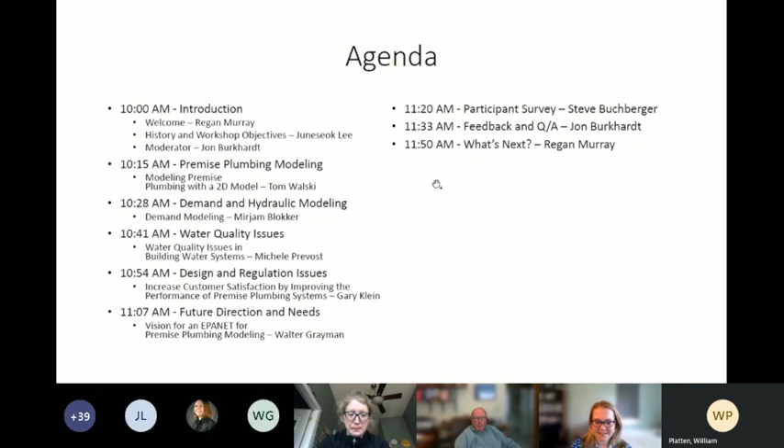Thank you, Regan. So let me first go over EWRI, the Environmental and Water Resources Institute. I believe most of you are already very comfortable with EWRI. Very briefly, it's ASCE's technical arm for environmental and water-related issues, and currently there are about 25,000 members within EWRI.

PPM, Premise Plumbing Modeling, was established last year in November, and it's a task committee of the WDSA, or Water Distribution System Analysis Committee, with a lead role in EWRI in advancing the area of premise plumbing modeling. So the purpose of today's webinar, which was originally supposed to happen as a face-to-face workshop, is to advance the science of this new field of PPM and help develop a building water systems management tool for use by practicing engineers, as well as the larger WDSA or water distribution systems research community, to support the safe design and operation of water distribution systems.

Having said that, I will turn it over to Jon, our moderator today.

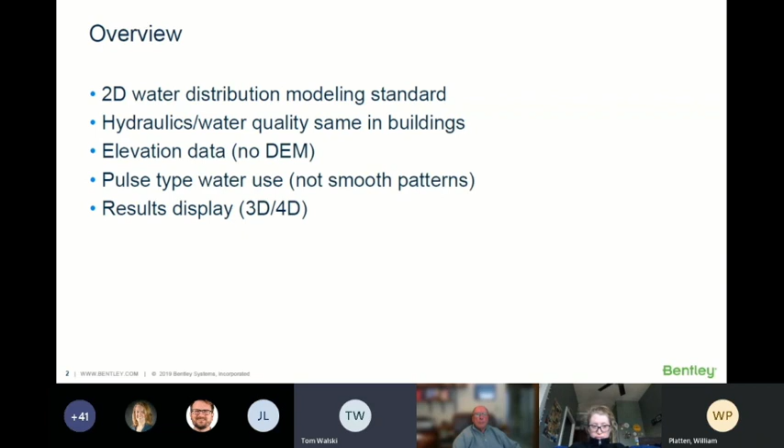Here's my trivial model of a system over on the... let's see, do you see my pointer when I'm moving it, or is my pointer not visible? No, I guess it's somebody else's hand I see moving around.

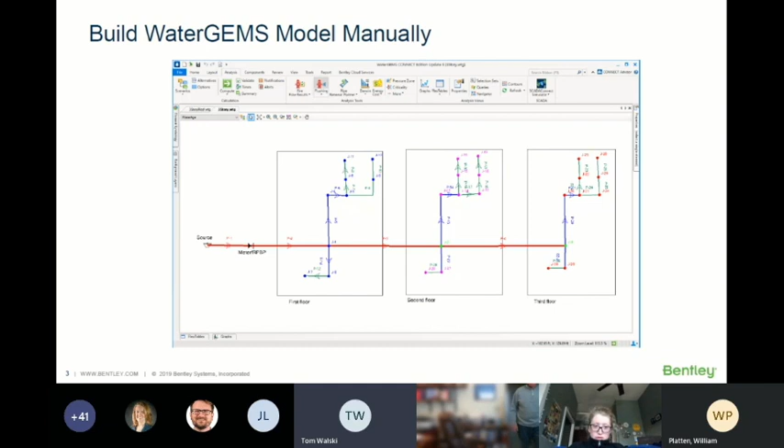This is what we have to do when trying to model a building with standard 2D models: break the floors up into individual models. Here is the building I built, a 3-story building. We're going to treat the main in the street as a constant head source. This isn't always true, but usually most buildings don't have a significant impact on the distribution pressure, so treating this as constant isn't too bad, or giving it some kind of pattern. Then we just laid out each floor with its own little plumbing, and we'll go over what those floors look like.

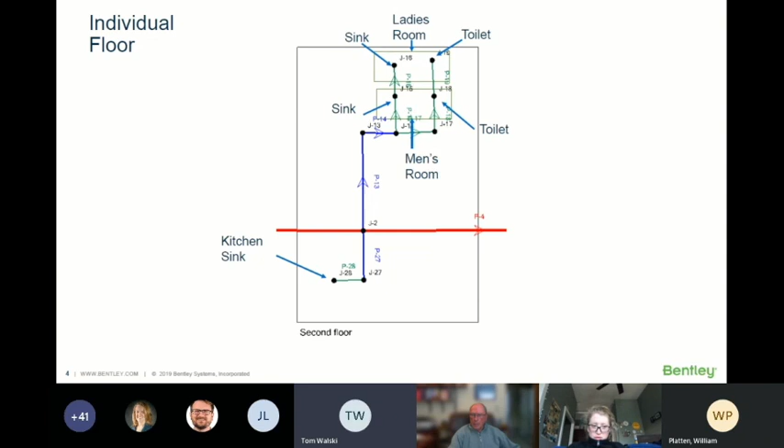Here's what the floors look like. Each floor has its bathroom with a sink, the ladies' room and the toilet, and the men's room. On the other side of the building is a kitchen sink. So this is our trivial building. Each of the floors is symmetrical just to make my life easier.

You can run the model with those patterns. I used a random number generator to make my demand patterns, with nobody in the building at night, and all these different water uses during the day. You can color code by these elements to see which faucets are running, which toilets are being flushed. Now I'm coloring by velocity of water in the pipes, and this looks really impressive. You just let this run as a time simulation, and you can see all these building water uses flashing on and off during the day. It's a good way to illustrate what's going on and track water quality, and it actually looks pretty good. You can see, okay, there's a guy who just flushed a toilet and didn't wash his hands, that sort of thing.

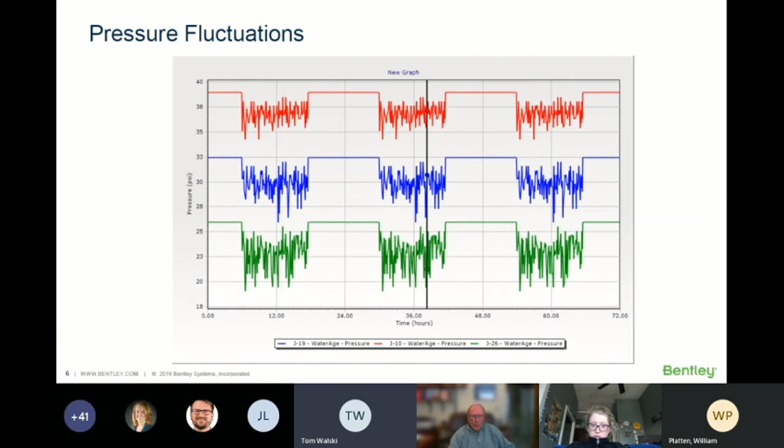Here's what the results look like for my little model. At night the pressure is flat because nobody's in the building doing much, and during the day you see fluctuations in pressure. We can do this for any property. The red is the bottom floor, so you get good high pressures. The second floor has lower pressures, and on the third floor we have the green, which is the lowest pressure, the higher up the building you go. So we can do all these kinds of things with existing tools, which is what I'm trying to show: that we can do building modeling with the tools that are already out there.

Now that's the age versus the age of the water in the street that you're starting with. You can also have a distribution system model that can model the inflow, but in this case I'm just using that as a constant at 0 age. The age isn't too bad. That first glass of water somebody takes out of the faucet is going to have some older water, but even so, unless it's a huge building, it's not too bad.

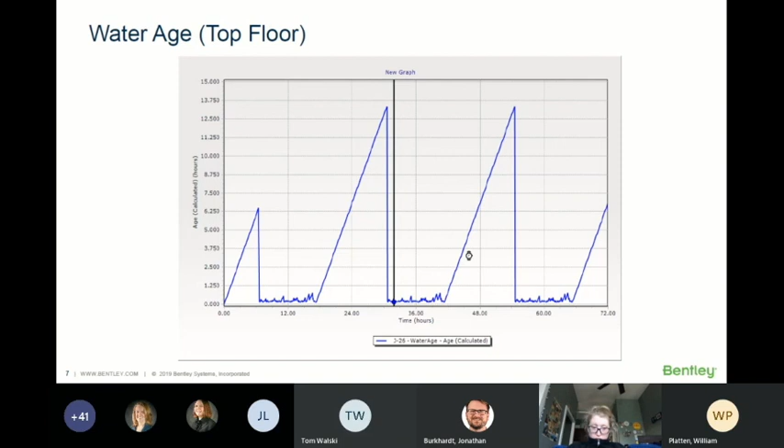Okay, and then we can actually look at the color code by velocity and see which pipes at any time have velocities there. So we do velocities and demands, and this is useful for seeing where the water goes. So this is the age in this particular case. You can see, at a certain hour, some of these lines haven't been operated yet, so they're getting old water, while the ones that have been operated don't take very long to get flushed out with clean water.

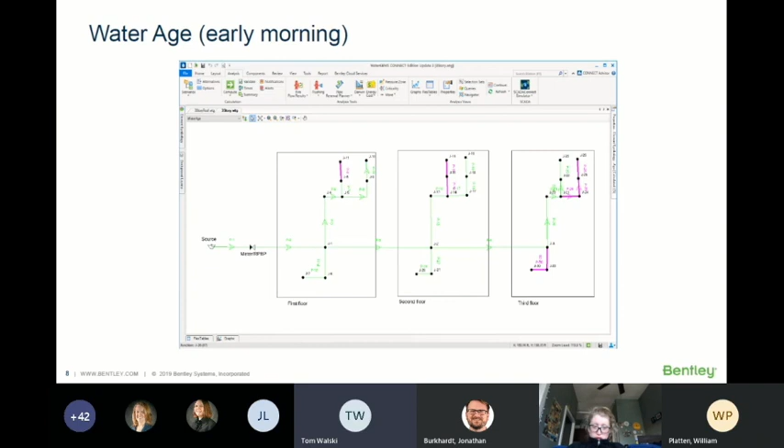Okay, then the next part of this is rooftop tanks. The place where things really change now are in buildings that have rooftop tanks. We're doing some work over in China where a lot of the tall buildings have rooftop tanks, and they really change the dynamics and the water age pattern pretty significantly. They keep the pressure a lot more stable, but they affect the water quality because the water age in these tanks can be pretty high.

And this is some work we're doing over there that is showing this is going to be a bigger problem than in buildings that don't have tanks. So with tanks, just like in water distribution systems, if you're having problems with old water, you look at the tanks, because that's usually where most of the aging occurs.

When you do have tanks, though, it doesn't really drop down that much. It takes a while for the water age. Depending on the sizing of the tank—a lot of tanks are sized for like a peak day flow or something like that—it takes a long time to turn over the water in the tank when you have that.

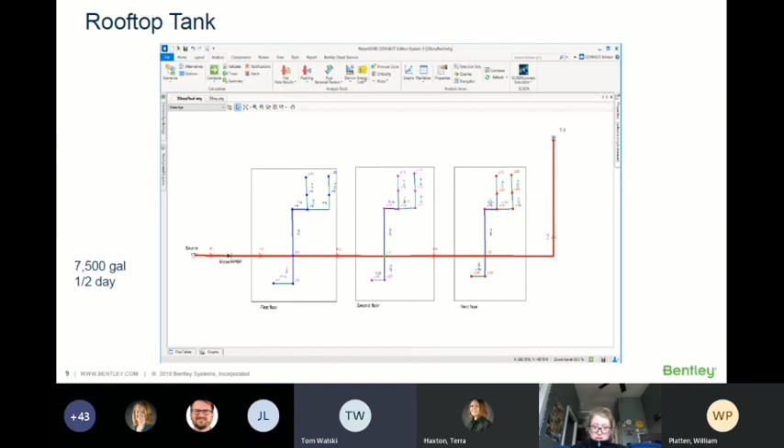So this is the kind of stuff you can experiment with. What if we don't fill the tank up all the way? Let's say we only fill the tank up part of the way during the day, or let the tank drain a lot more. A lot of these places, as soon as the water drops a couple of millimeters, they turn the pump back on, and that's not a good thing to do. But we can experiment with this, and this is the kind of result you see in terms of pressure.

Okay, then I looked at how to lay things out vertically, just to show that it can be done, two different ways where you put the riser pipe, but it doesn't look as pretty. I wasn't as impressed. I like laying the different floors next to one another, but if you want to lay them on top of one another to help display what's going on, this is what they look like. You can see this is laid out by diameter in this particular instance.

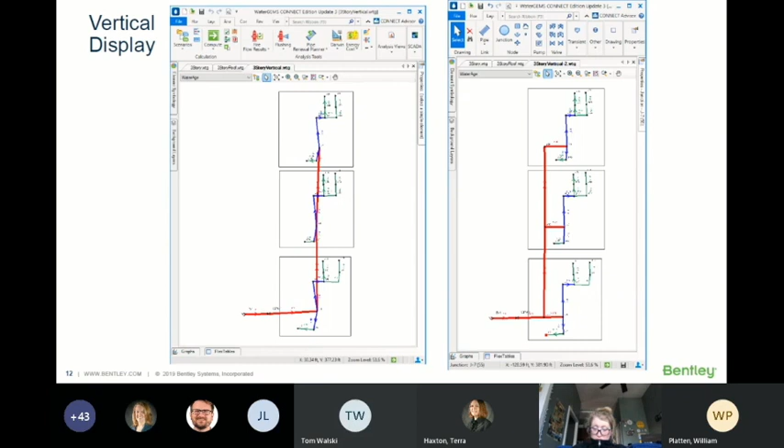So the big need here is how do you build these models? Before you could do it with a GIS, but we don't have GISs in buildings. So what you need to do is go to BIM type software. This is one of the places where we have amazing software where we can take the building, do an X-ray of the building, and have the material that tells us where all the pipes are. This is something you create as you're building the building.

You have a BIM model, building information modeling, and we could use it. That particular picture is actually an HVAC system, not the water system, but you get the idea that the data is there. So just as we import data from GIS to build water distribution system models, you can import data from building products pretty easily.

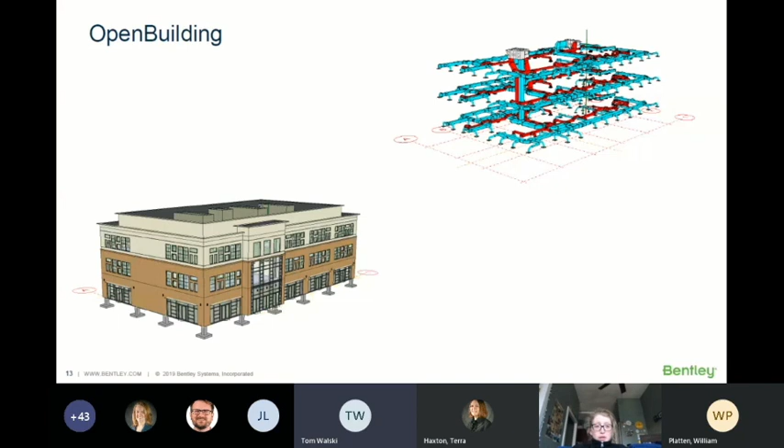Looking towards the future, this kind of stuff we already have. We can actually do hydraulics in 3 dimensions and show flows and all, but unfortunately it's only based on some really simple steady state hydraulics. So what we would need to do is link this kind of 3D technology for model building and results visualization with WaterGEMS or an EPANET-based solver or something, in order to come up with really great visualizations.

I think the 2D stuff that I was showing is okay, it works. But if you can show things this way, it really looks good.

So it's something we're kind of uniquely positioned for, because we have all these tools that work in 3 dimensions. We've done a lot of this, I guess we actually call it 4D, a 3-dimensional viewing based on context capture over time. We've done things with our flooding products where we could watch floods, actually move anywhere we want in the city and stand there and watch the flood come in and out.

So it's definitely doable, and it's a matter of when the demand from people who want to buy software and have money is there, we'll have this stuff implemented pretty quickly. The devil's in the details, of course, but the concepts are pretty easy. And again, for those of you who are researchers and don't have money, we'll work with you. If you want to do something built on 3D visualization, you can talk to me and we could discuss that.

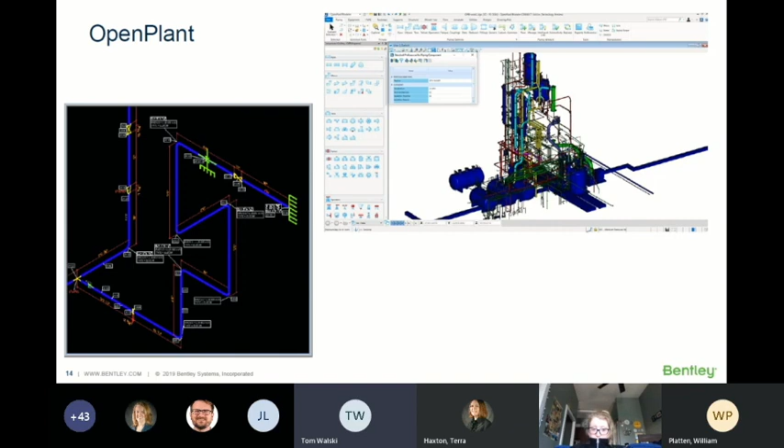Okay, next. I don't really do the 3D stuff myself, so I'm not that good at it, but we have people who do. To summarize, you can do water distribution, hydraulic and water quality models in buildings with what's right on the shelf now in EPANET. The big issues we have to overcome are easily bringing in elevation data and quickly doing that.

Modeling pulse demands, as I mentioned, I just used a random number generator to do the demands, and we can do better with that. I'm looking forward to the talks about hydraulic Poisson rectangular pulse models and such to generate small time scales, and tools to display things. We can do 2D displays, but we've got technology out there that goes even further than that. So that's some of the needs and what we have right now.

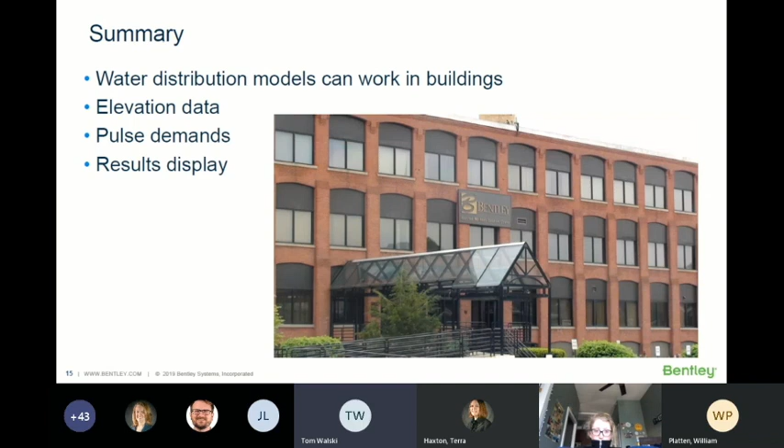Okay, thank you. The issues Tom brought up related to demand estimation, and that segues into the next section on demand and hydraulic modeling, where demand estimation and hydraulic modeling issues are important for premise plumbing systems. Water quantity delivery issues in a home or building can arise from poor distribution system pressure, as Tom noted, and then even from poor premise plumbing design or changes that may have happened over time that didn't take into account the whole history of the building.

Water quantity has been a major concern in building design, with a focus on ensuring each demand receives the minimum flow when requested. While many issues of water are more volume-based, as some people on this call may have noted, where you just wait for a glass of water to fill and it may take a little longer, or you may take a more time-based use where a shower with lower pressure may not really be desired, but within reason it's tolerated.

So you just take a shower for some length of time, and modeling the actual demands related to that is a challenging topic. Accurate modeling of usage patterns is critical, and models must ensure flow rates are accurately modeled if pressure conditions are not sufficient for the requested demand. Models may also need to predict and keep track of who or what is using the water. Mirjam Blokker from KWR Water will now present some areas on this topic.

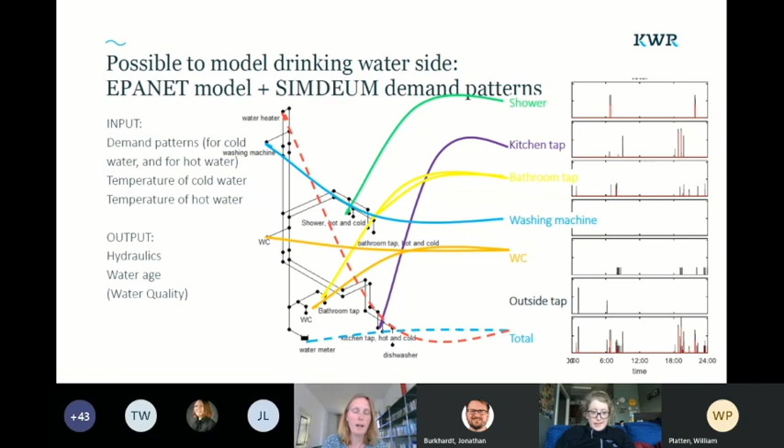So we've taken all the different end-use patterns and applied them to the specific tap. Then you can look at hydraulics, as Tom showed, and water age, and other water quality. So we've looked at temperature specifically, but also at some microbial parameters.

I would like to also apply these to premise plumbing of the in-home sewer, and I think the DRAINET model from Heriot-Watt University would be very useful. I am in contact with David Campbell, but haven't gotten the model yet, though he's willing to cooperate. Hopefully by next time I can show you some results.

It's very similar to the demand side, but this time on the discharge side, we can also add temperature and different nutrient loads depending on the end use. So nutrient load from shower water is different than toilet water, for example. Hopefully we can show you some results next time.

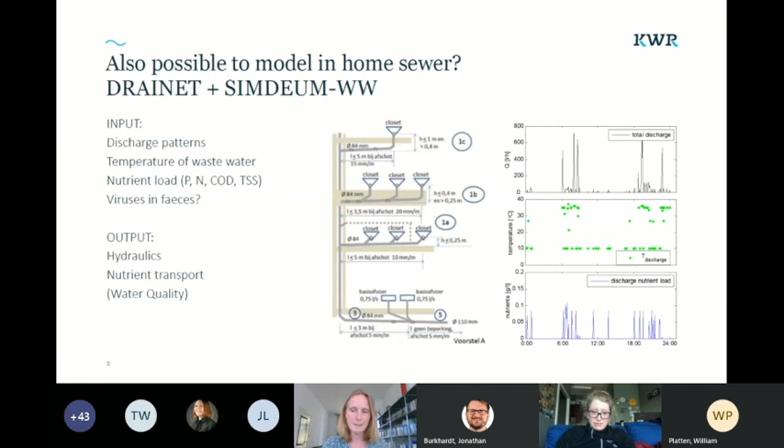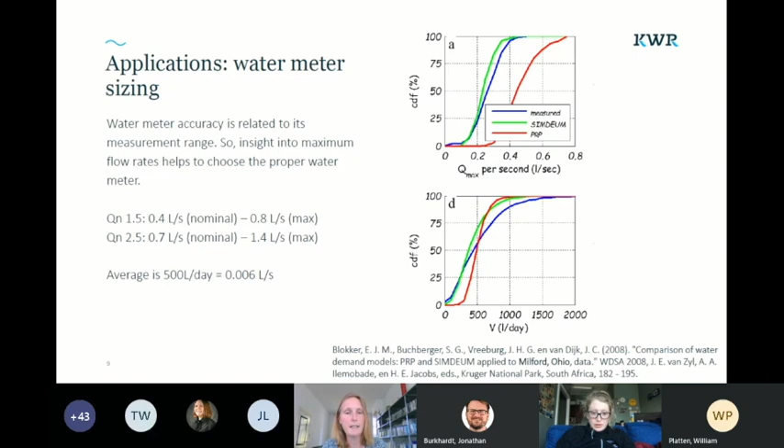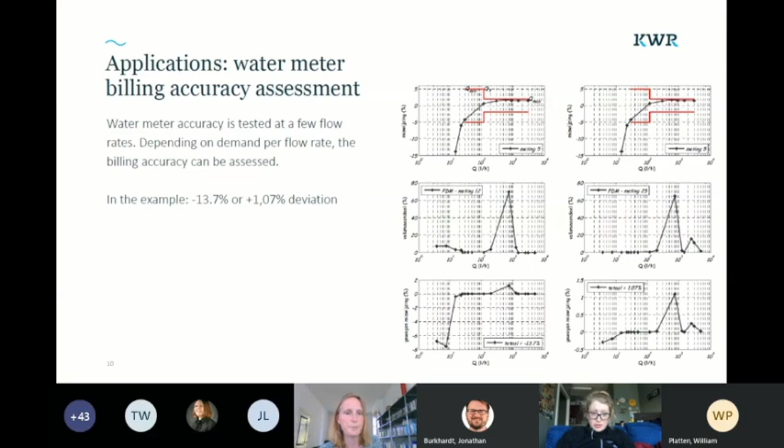By also looking at how these flows are divided over different flow rates, you can also assess the billing accuracy, as typically at lower flow rates the water meter is less accurate. But if there's not a lot of use in that area, then the effect on billing accuracy is not that large. It could be different depending on the demand patterns specific to the building you're looking at.

One thing we did at TU Delft: Juliana Zlatanovic built a really nice model in an elevator shaft, mimicking a domestic drinking water installation. She measured for 1 year, and she didn't invite people to live in this elevator shaft, but we put SimDeum demand patterns on each of the taps. There was a different demand pattern for each day of the year, and we also introduced weekend days and weekdays.

She measured temperatures and also some microbial parameters, trying to relate that to water age and things like that. The temperature model was found to be really close to what we actually measured, so that was a good validation.

Another application is looking at demands under stressed conditions. For example, what if there's not sufficient pressure, or what if electricity is not available, or what if people would have to be at home in home isolation. We haven't looked at that yet.

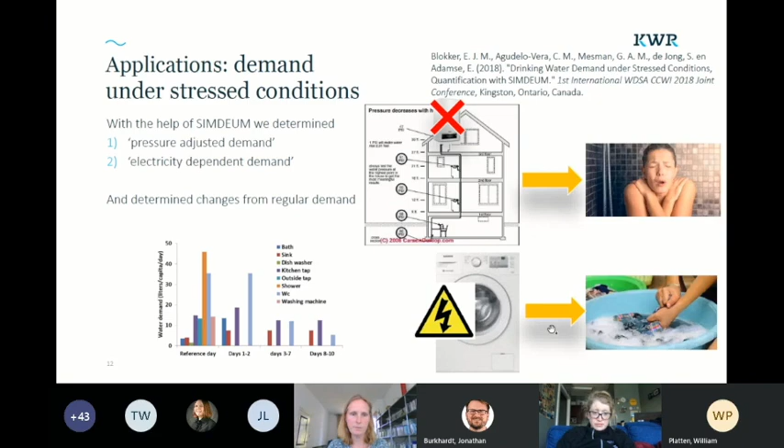Another application that we looked at is the production of light gray water from showers, and the need for light gray water to flush toilets and use in your washing machine. Depending on the people that live in the house and their behavior, you can determine what storage you need, not just for a single house. You can also look at an apartment level. In this case, we found that a storage capacity of 200 liters per household could really be sufficient to get a good reduction in drinking water demand.

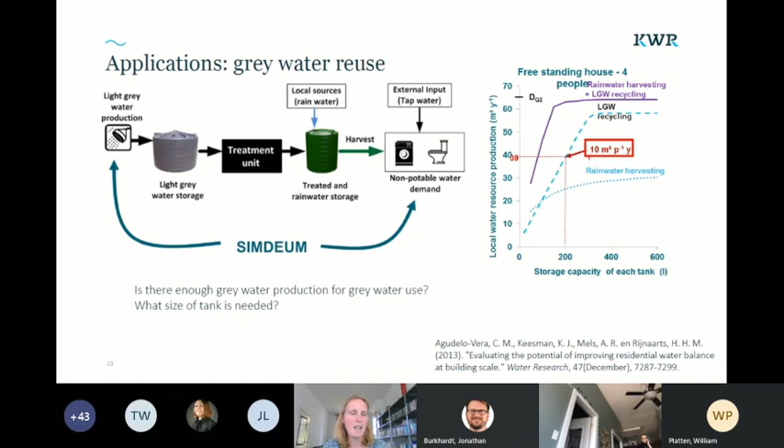And rainwater did not add that much to it. But in this case, it's really nice to look at the same scale at what is produced and what is demanded, instead of sort of per-day estimations.

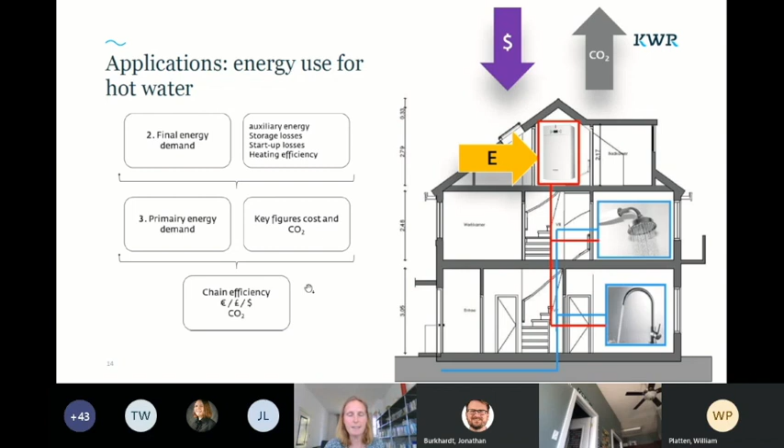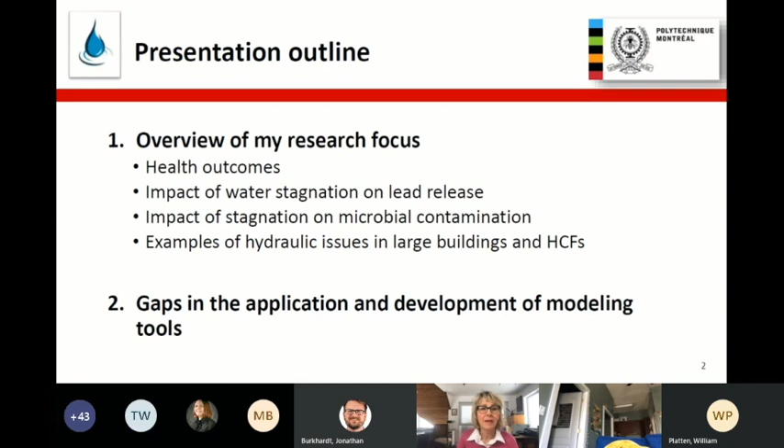So we know that distribution systems are a significant source of waterborne outbreaks. We kind of relate that to breaks, negative pressures, intrusion, ingress. But we know that there are health impacts of non-acute contamination events, and there is no reason not to think that some of these issues are not present in these large buildings.

And there are numerous studies on intermittent flow that show such health effects. Backflow and syphonage is certainly an issue in these buildings, and ingress, although the work has been done mostly in distribution systems, is also a concern in terms of causes of waterborne outbreaks or disease.

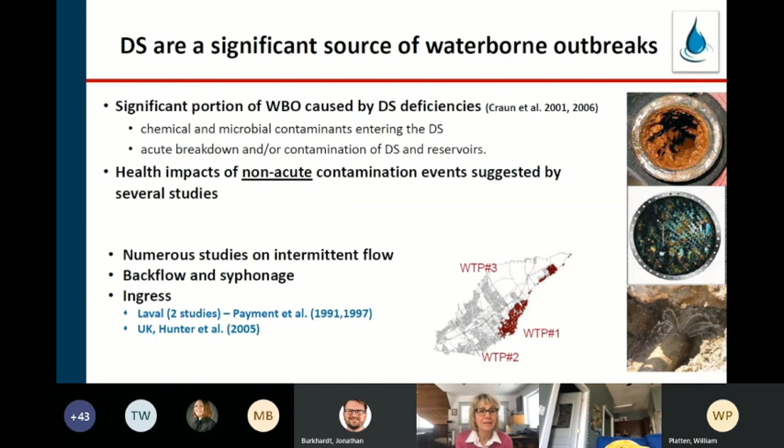And NASEM came out with a very scary estimate of the non-outbreak related numbers, which are most probably community acquired in hot water systems and cooling towers. It begs for a better control of our systems. Most importantly, these infections that are related to biofilm organisms, way more so than fecal contamination, which was our prior focus in many of our studies for modeling, are now driven by things like NTMs or Legionnaire's disease.

So I'm not going to have a slide on the health impacts of lead. I just put a couple of figures here to help you think about what we can do with better prediction of the impact of water age.

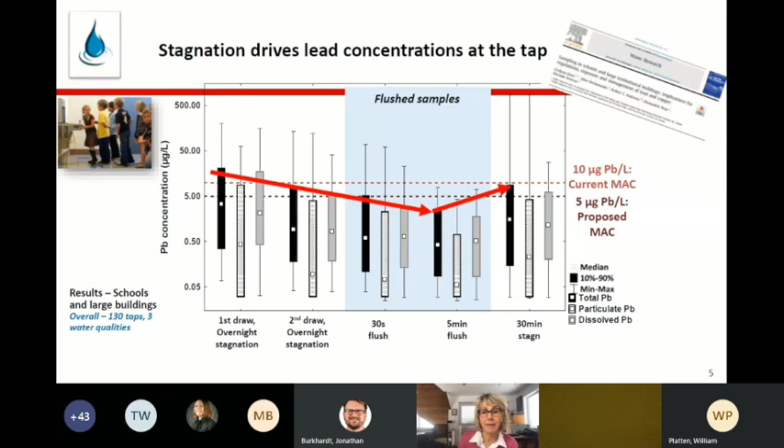This begs the question of what we can do in these large systems to minimize stagnation by improving the hydraulics, acknowledging that part of this is at the distal point where it's very difficult to reduce water age. It's different in residences with lead service pipes, and certainly looking at the impact of water conservation devices on increased stagnation in lead service lines leading to higher exposure is a main concern of mine.

I've been working a lot more on pathogens in the last 7-8 years in large buildings, identifying niches of pathogens in hot and cold water that actually drive infection risk. Most of this work was done in hospitals with cases, looking at the role of aerators as a vector of infection, and the impact of material on the resistance of Legionella in biofilms to disinfectants such as chlorine.

Looking at optimized thermal control regimes, which is basically balancing your system and putting it in control. Looking at unintended consequences of water and energy conservation, redesigning the sink environment to prevent neonatal infections. Again, quality at the tap, but also in the sink environment, drain, and surfaces as well.

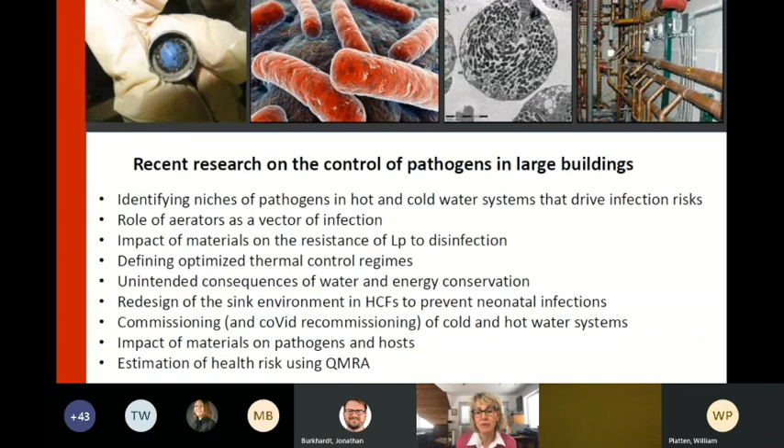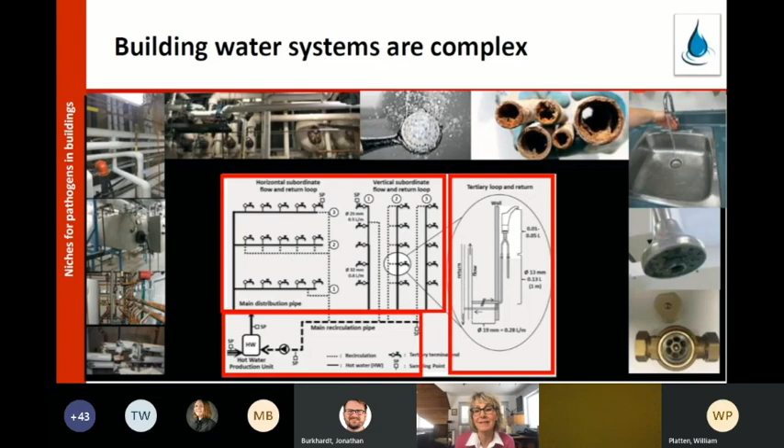So a couple of slides to give you some thoughts. There was a nice slide before from another presenter showing that buildings are complex. Here I'm showing a very simplified diagram of the hot water system. The bottom red rectangle shows the main recirculating line system. The one just on top would be horizontal or vertical risers, distributing pipes, and most importantly, there's this distal part, the tertiary loop and return, and this last little part that gets no recirculation. Keep that in mind for the next slides.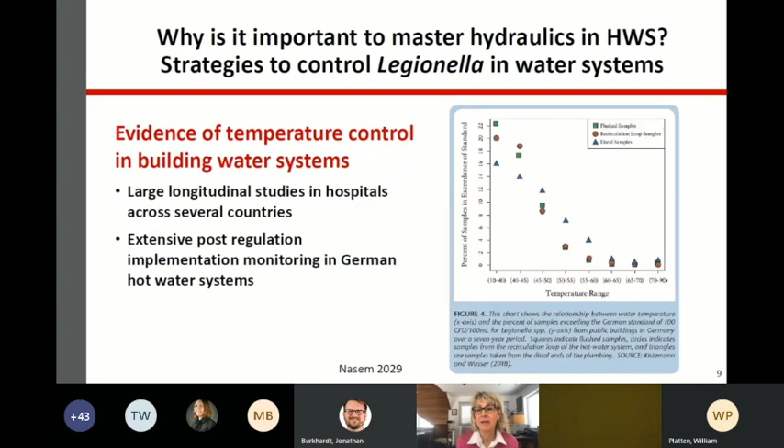The interesting part is that the green squares are the flush samples, so water that hasn't been stagnant, the recirculation in red circles - but the little triangles are the really interesting part. When you maintain temperature throughout a system right to the distal system, you really bring down these numbers. So again, this is a call for why it's important to master hydraulics in hot water systems.

On the other hand, here is a temperature profiling study we did in a hospital where there was an outbreak on the 7th floor. You see these little numbers - these are temperature profiling coming in and in the return loop for hot water systems. At the end of these blue arrows you have 34 degrees C, 39.3 degrees C, and 36.8, depending on the time of day. This showed that for this hospital, a deficiency in maintaining proper recirculation and balancing the system basically caused an outbreak, stressing the importance of balancing the system with very simple tools.

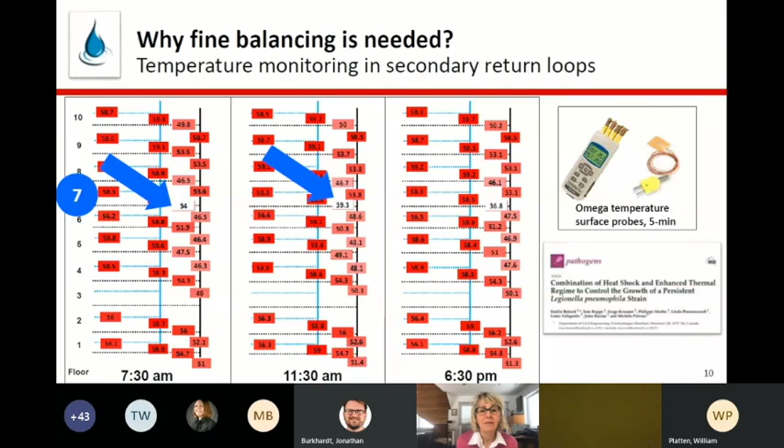Okay, next slide, please. Oh, good.

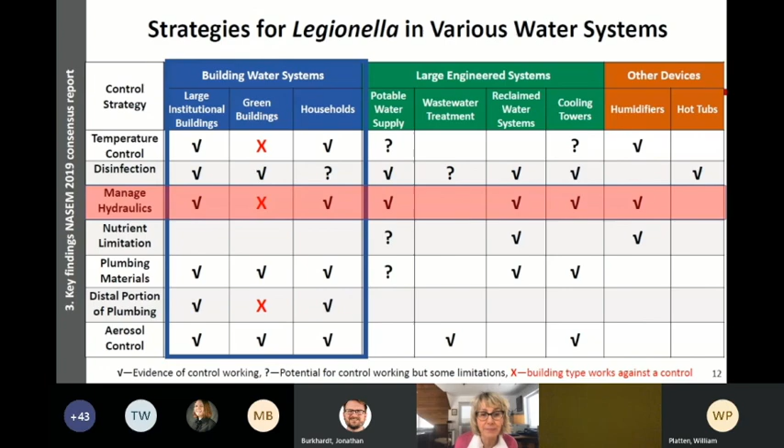So NASEM came out with a really nice table, I thought, on what we can do to control Legionella, and I put in red, manage the hydraulics. What came out for building water systems in blue is that for large institutional buildings, green buildings, and households, managing hydraulics is really the key to control Legionella. The little red X means that green buildings with water conservation can actually work against the control of Legionella. So again, hydraulics being at the center of our focus. Next slide, please.

Okay, last case study, to give you an idea, on a LEED school case study we were involved in two years ago. Very low demands, you're seeing for 200 kids, a peak demand flow that's very low. The school, when open, was subject to a boiling advisory that lasted for about a year. We had to implement continuous flushing at the tap to bring the school back under compliance because it was very high in total coliforms and HPCs.

And obviously for these really good systems in terms of conservation, the ability to maintain chlorine residual is really difficult, because of the way we design these systems with large volumes still and with spread out points of use throughout the school. Next slide, please.

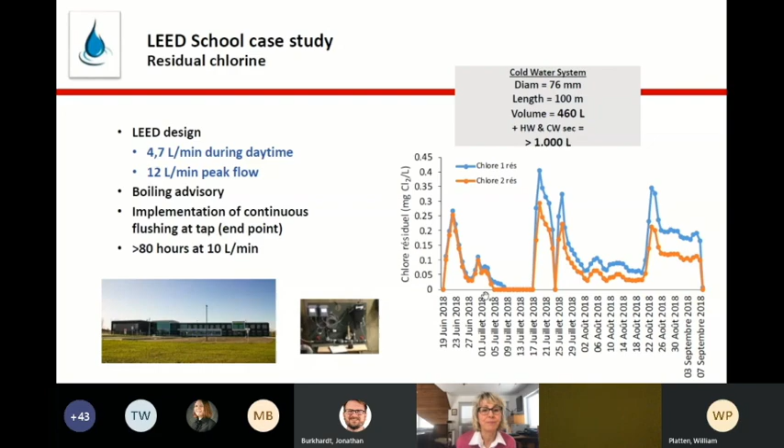So my last slide, I had a couple of ideas on what we could do with these models as they are being developed. I think they need to be used to adjust operation to minimize the release and growth of pathogens, targeting hot and cold water systems, and including the impact of materials and varying stagnation patterns, which is already underway.

I think it's critical to understand if and how much residual can be maintained in large buildings. The Netherlands doesn't use residual in distribution systems, but we do in North America, and we need to understand what can be done. Assess the risk of water and energy conservation measures, especially when we retrofit existing buildings.

Review the design of new buildings to avoid extended stagnation water quality losses resulting from the desired low water demand, and assist building operators in siting of automatic flushes.

And I would make the case that one of the really good things about the Dutch initiatives that Mirjam was talking about is she has worked in several instances to try to relate this to the QMRA models. QMRA models are not perfect, but they give you a relative risk that can be very, very useful to decide where to act in large buildings to reduce health risks.

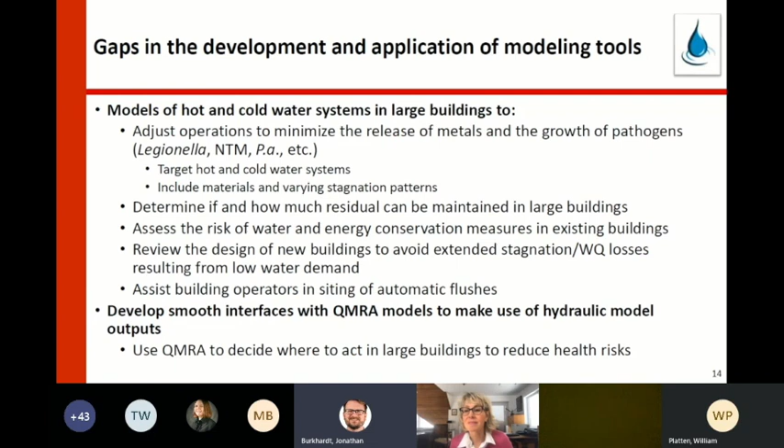So many regulations focus on the quality of water produced at a water utility, and many building codes focus on ensuring adequate supply of water into the building, namely pipe size or material. System-wide modeling has been used for years to help understand how water quality changes within the distribution system. In recent years, more attention has been given to the impact of the building and its characteristics on water quality, both in large buildings and homes. Modeling tools may be able to support architects or other building planners when designing plumbing systems, both from a water quantity as well as quality side.

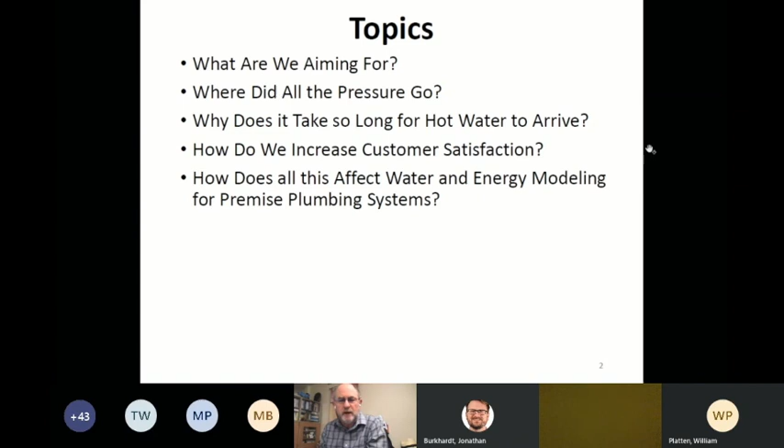What are we aiming for? People want the flow of flowing water. They want the water flowing from their showers and faucets to feel right. They want their toilets to flush first time every time. They want clean clothes, dishes, and bodies, and they want the service of hot water as efficiently as possible.

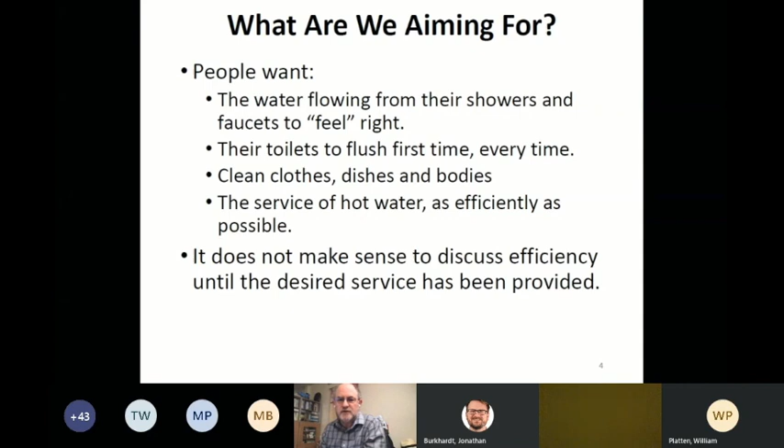It does not make sense to discuss efficiency until you've provided the desired service. So as a comment on some of the slides we've seen already, where green buildings don't perform well is they're not focused on the service, they're focused on the rules for green buildings, they're focused on the flow rates, not the service of hot water or cold water, and that needs to be fixed.

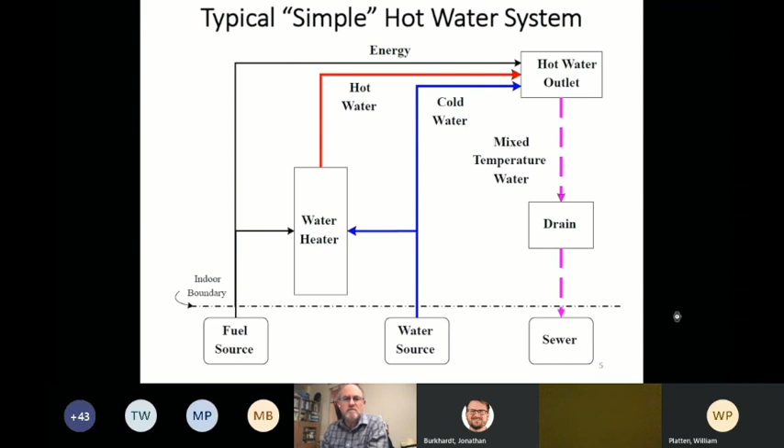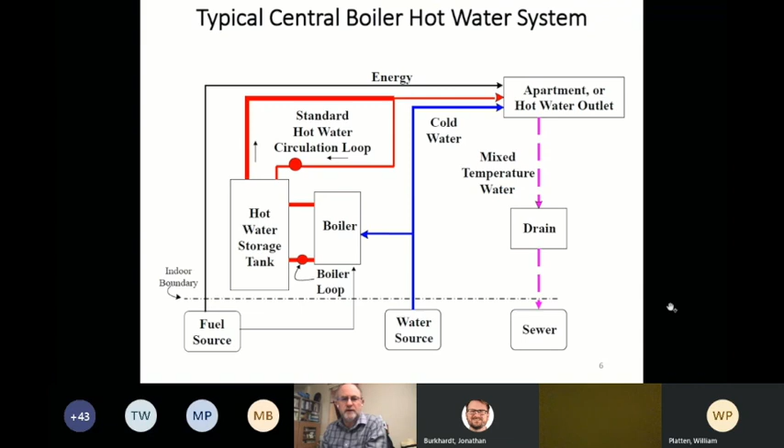Much of my work has been focused on hot water. What I've learned over the last 25 or so years is that people want hot water now and they don't want to run it on their shower. Hot water now is dependent upon having a source of hot water close to each fixture or appliance, and it must be hot enough to use as hot water before you turn on the tap.

Continuous is not running out while you're in the shower, and it turns out the problem from our evaluation is not the first shower or the second shower, it's the third shower. The third long event tends to be the one that loses temperature, and people complain.

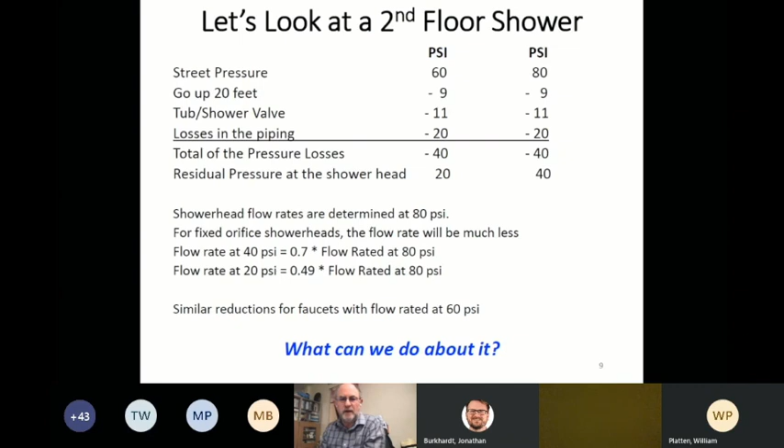So the problem is that if you didn't like 2 gallons a minute at the shower at 80 PSI, you're not going to like it if it's either 1.4 or about 1 gallon per minute. That's why people complain. We can do things about it.

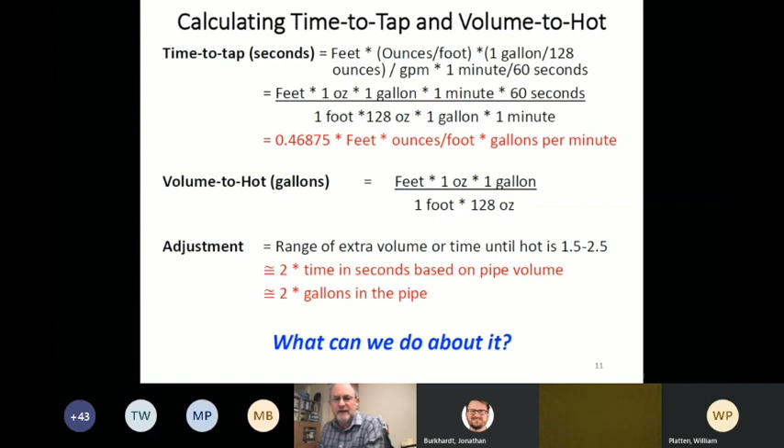So what we've learned in research that I did with Jim Lutz in the last couple of years is that a huge number of events in a daily routine don't actually ever reach the fixture in question because the volume of the event is smaller than the volume in the pipe. We have to figure out how to get that effect into our modeling.

So how do we increase customer satisfaction, which is my key interest in all of this? You have to figure out how to reduce the time to tap. We have to reduce the pressure drop, and then we have to install pressure-independent faucet aerators and shower heads.

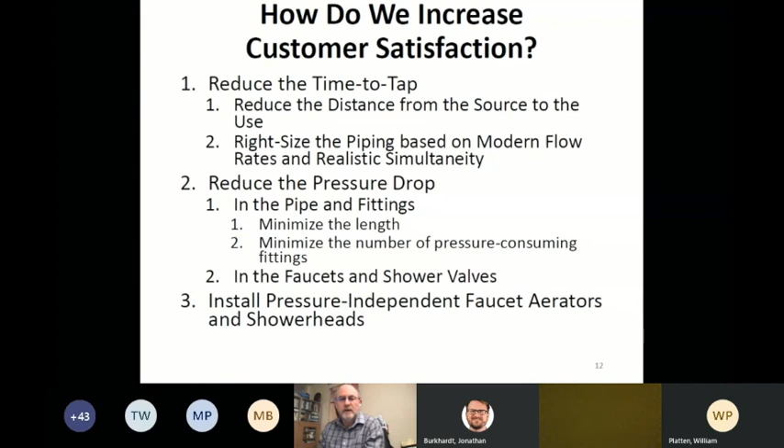Let's see here. I'm going to pick from a few of those topics because of limited time today. When we have a chance for a longer conversation, I'll be happy to go into detail. So let's reduce the pressure drop.

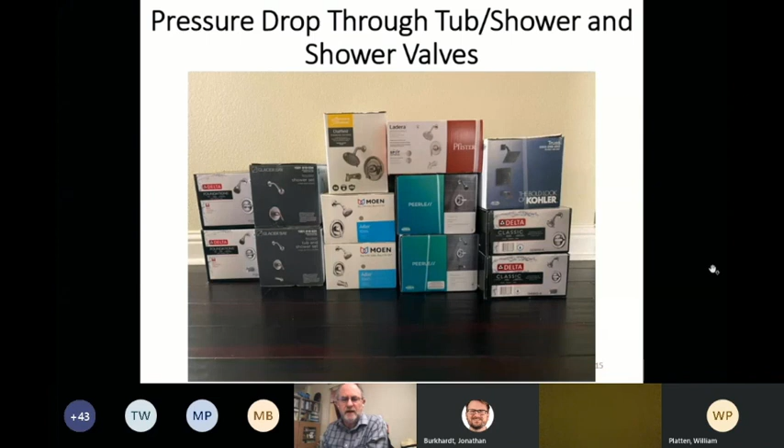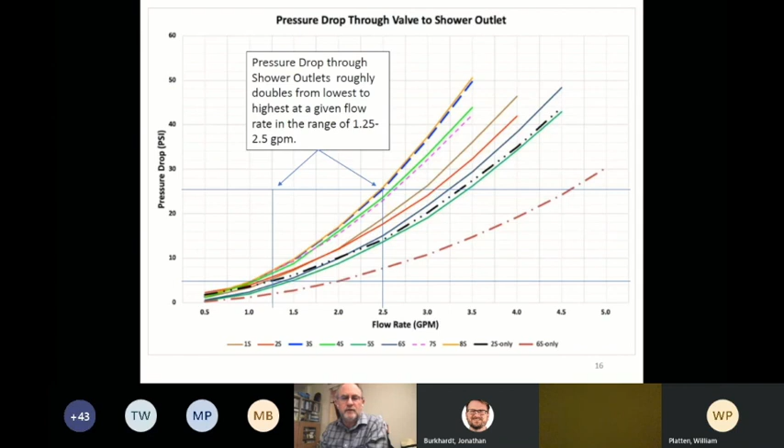There are large restrictions. These are all the 1016 compliant valves for anti-scald in the US.

So I think we have to think about installing pressure-independent faucets and shower heads. My question to you is: which one do you want? Do you want the normal pressure curve aerator, or do you want the green or the orange lines?

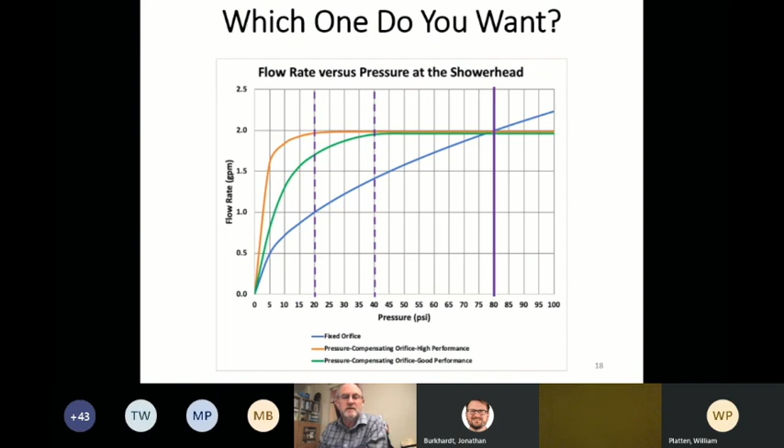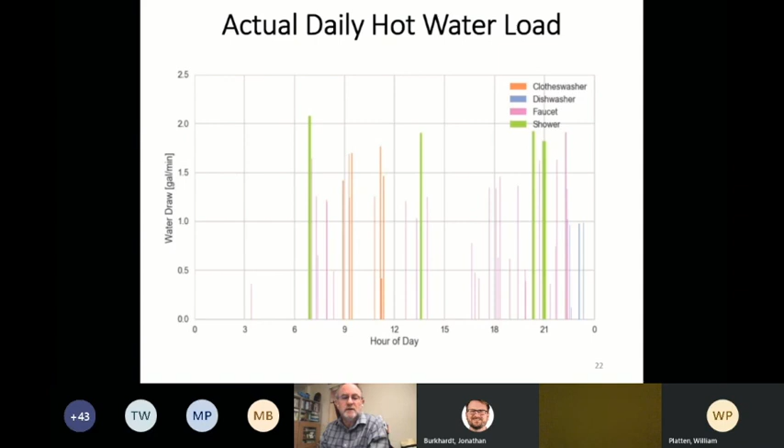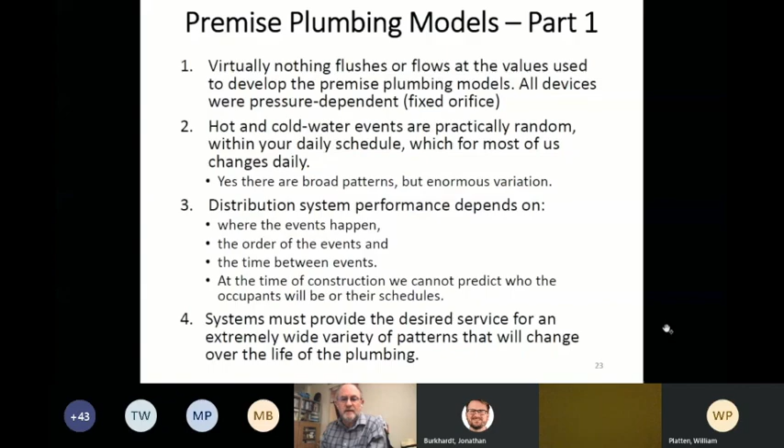So in the models, as I said earlier, nothing flushes or flows at the rates assumed when the plumbing models, and the plumbing mathematics for pipe sizing, were developed. Hot and cold events are practically random. Yes, there are patterns, but there's huge variation. Distribution system performance depends on a variety of things, and when we model, we have to assume we cannot predict who the occupants will be or what their schedules are. So I think we need to design plumbing systems that work well independent of that.

Premise plumbing models do need to be revised. There are very few steady state uses of water - virtually all of it is intermittent. The calculations need to be based on modern pipe and fittings, but there are no good data for the modern fittings in the tables. I've got the best data set I'm aware of at the moment because I've actually measured it in a consistent manner. We need to account for the waste of water waiting for hot water to arrive for those events that require it. Short events don't actually seem to require hot water - they require water of some temperature. We should think about that.

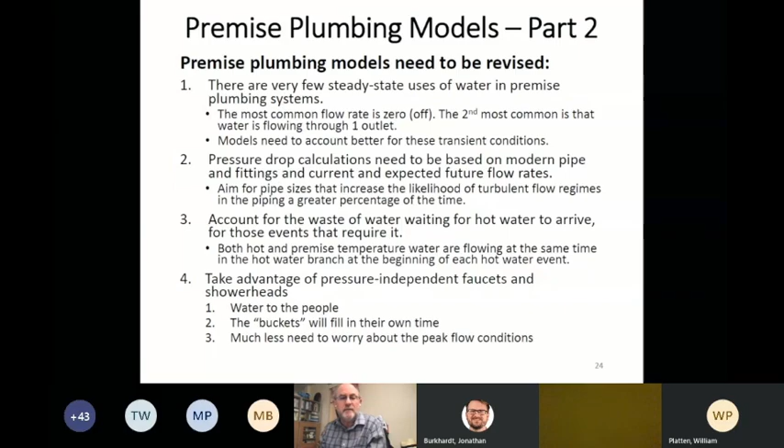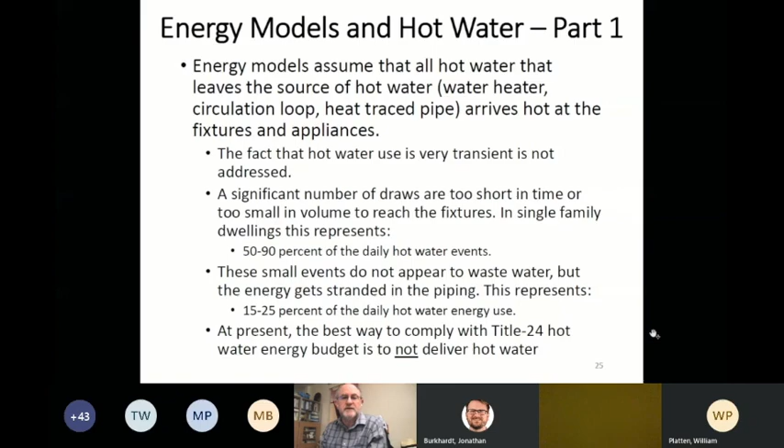Energy models currently assume that all hot water that leaves the source arrives at the fixtures. It's not true - you can read all about this later.

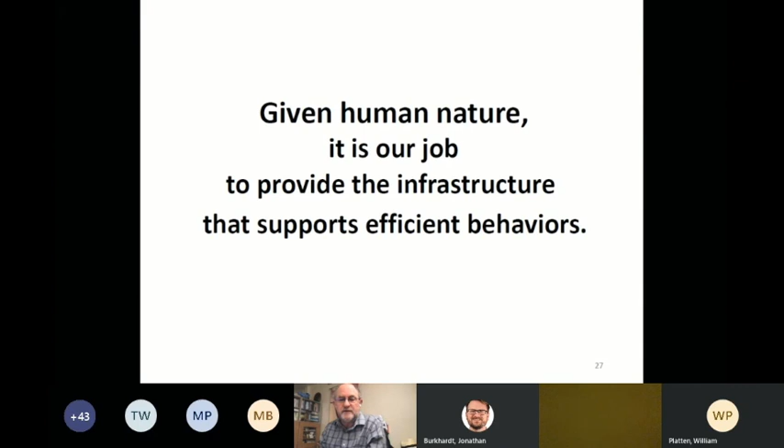Energy models need to be revised. We need to provide an equal level of hot water service at each fixture in order to properly compare the performance of alternatives. Currently, we penalize systems that try to deliver hot water efficiently as opposed to those that don't deliver it in many cases at all. And then given human nature, I think it's our job to provide the infrastructure that supports efficient behaviors. Thank you.

Thanks, Gary. So that was great - that showed a lot of the practical issues associated with building design, and definitely interested in the data sets you've collected.

So the last session of the day before we do some wrap-up activities is related to the future direction and needs. As all the speakers up till now highlighted, the complexity of premise plumbing modeling relies on plumbing layout, usage pattern, and more specifically chemical and biological kinetic data, if we're going to get to that level, or temperature modeling. It requires some kind of available modeling tool. Although capable tools like EPANet may not be enough to capture the complexity of premise plumbing systems, at least on their own. Full rendering of 3D CFD modeling may be overkill, but a multi-species 1D model with dispersion may improve modeling of various water quality issues. And when coupled with a probabilistic agent-based demand estimator, as previously discussed, we may have a valuable tool for modeling premise plumbing systems.

And now our final speaker, Walter Grayman, will discuss how we as a community can move premise plumbing modeling forward and their associated tools into the future.

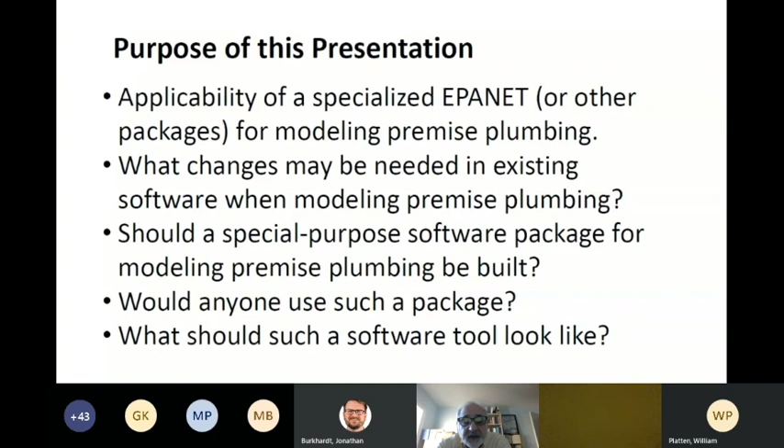This is called Vision for an EPANet Premise Plumbing Modeling. The purpose of the presentation, the things I'm going to try and cover and we should be discussing, is the applicability, the need for a specialized EPANet, or as Tom indicated, other package for modeling premise plumbing. Looking at what changes may be needed in the existing software when modeling premise plumbing. Should a special purpose software package for modeling premise plumbing be built? Would anyone use such a package? And what should such a software tool look like?

When we look at making changes, there are two general areas. First, there's the engine, which involves modifications in the way that EPANet or other software simulates the hydraulic and water quality behavior. And there's the interface, which is modifications in the interface and the integration aspects of the software. We do need to address both of those.

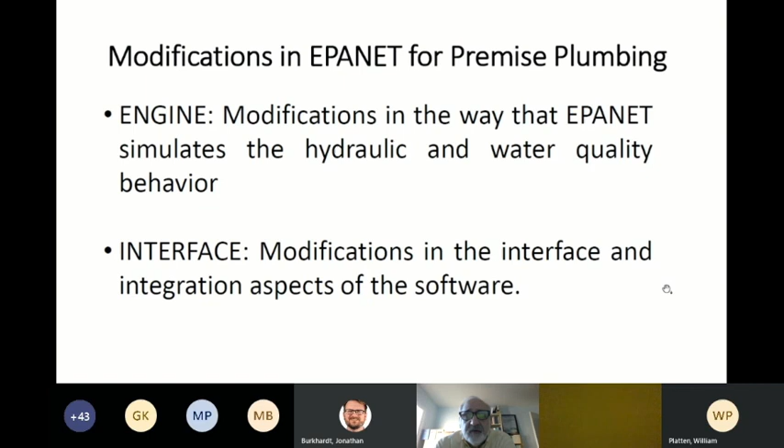Some of the areas in terms of engine modifications to support premise plumbing: demand representation, which Mirjam talked about and others talked about; some of the hydraulics, dispersion, laminar flow, operation of premise plumbing fixtures; and as Michelle mentioned, water quality components.

In terms of demand representation, again, Mirjam covered much of this. EPANet currently supports fixed patterns and to some degree pressure-dependent demands - the latest, more experimental version supports that. In premise plumbing modeling, additionally, it requires stochastic demands, very fine time scale patterns - it takes 20 seconds to brush your teeth - and hybrid models, which again has been mentioned, which are both volume and pressure dependent representation. So for example, a washing machine or a toilet that fills to a fixed volume, but the rate at which it fills is dependent on pressure. That's a different type of demand than what EPANet currently supports.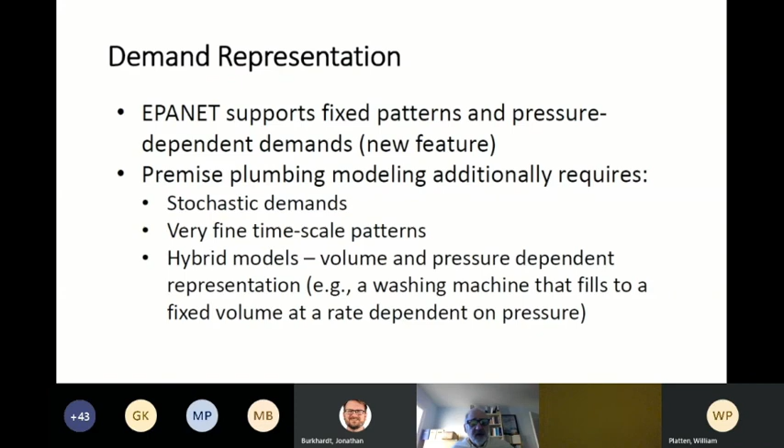In terms of hydraulics, some of the areas include laminar flow, low velocity conditions, dispersion, non-advective transport through the piping system, and highly intermittent flows, as we've seen in several of the slides, where there can be a 6 or 8 hour period where no flow is used in a system.

That's also operation of premise plumbing components. For example, I don't know, I'm sure Gary does, how a water heater works - is it a completely mixed tank, or is it a FIFO or LIFO type system? We need to know that if we're going to be able to model it.

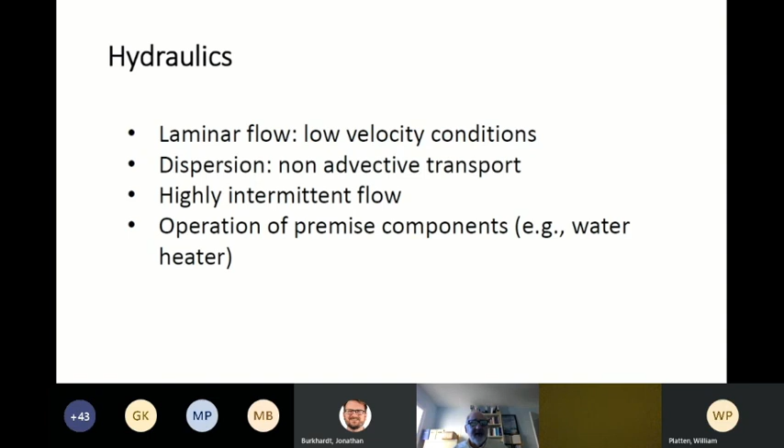And of course, water quality representation. We need expanded multi-species modeling of temperature, and temperature is not currently done in EPANet, though it is done in some commercial packages. There's also the ability to model Legionella, viruses, bacteria, lead and copper and corrosion, and other water quality parameters. Obviously there's additional research, and really basic research and understanding, needed before we can effectively model those.

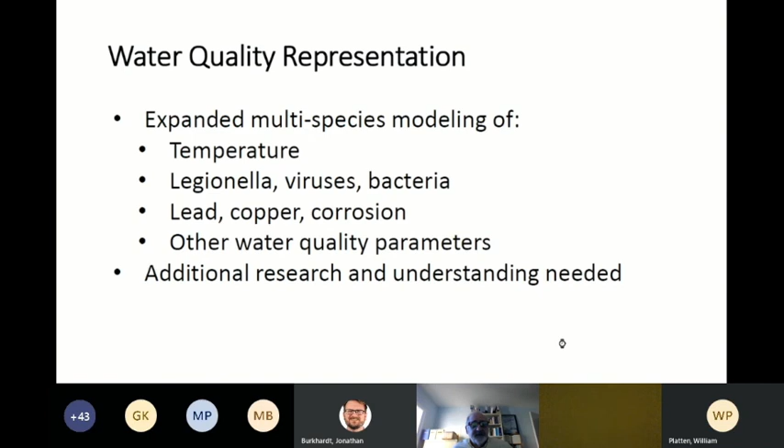On the other hand, there's the interface modifications, and I show the standard EPANet GUI. What needs to change, or what would we like to change? As Tom indicated, yeah, we can use the present software packages, but it may be nice if there were some changes to make it more friendly to modeling premise plumbing.

What components are needed in a premise plumbing model? How do we display it? There's 3D representation of premise plumbing, and again, as Tom mentioned, integration with CAD and BIM software.

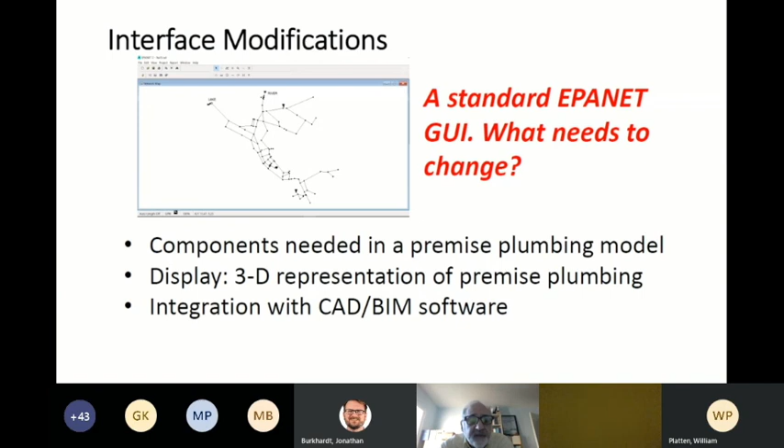So here at the top of the slide is the standard EPANet palette of components. Again, we can adapt things - we could use a tank to represent a water heater. But maybe it would be nice if we are going to be modeling premise plumbing that we have a specific palette - bathtubs, toilets, washing machines, etc., with each one of those having the characteristics specifically of that premise plumbing feature.

Display and integration - again, I'll reference back to what Tom talked about. We do need to reach out to the BIM, the Building Information Modeling, and the CAD communities to find out what is available, determine what is needed, and develop a plan to support premise plumbing modeling so that we can easily build a premise plumbing model rather than doing it by hand, and then be able to display the results in an effective way.

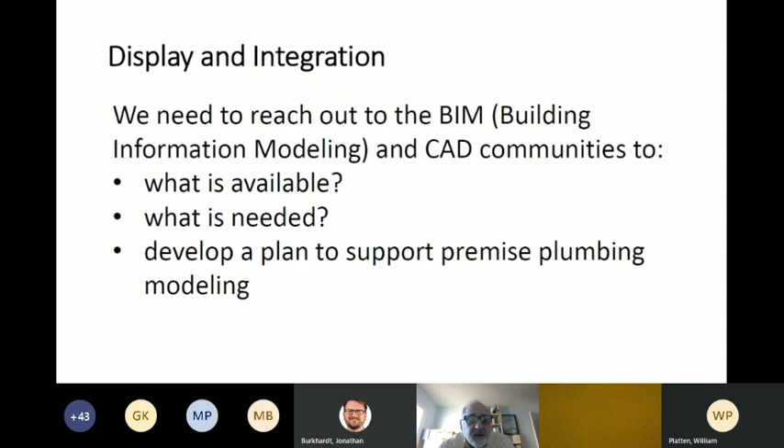We've heard about it, and over the course of the next several months as the task committee is working, we want to identify the potential applications for EPANet PPM, as I'll call it, or a commercial package. This includes assisting in the design of premise plumbing, improving the operation of premise plumbing, which Gary talked very much about, investigating the vulnerability of premise plumbing to contamination, and understanding the water quality processes in premise plumbing. There are many more that we're going to try and explore within the task committee.

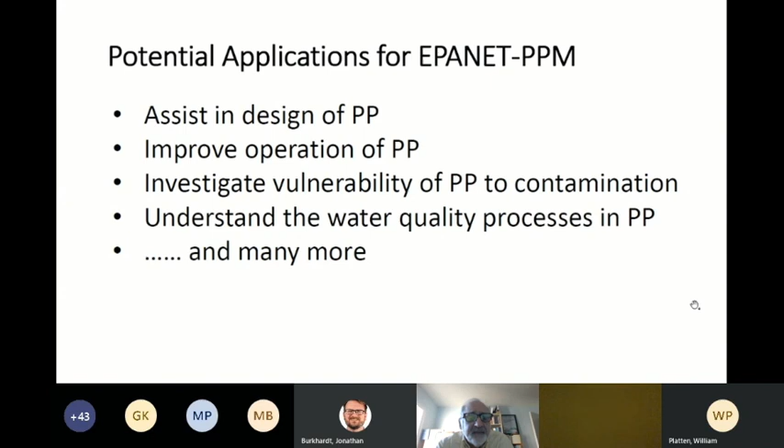So, some points for discussion - these are not meant for today, these are meant for the future. Is there sufficient interest in having a version of EPANet or a commercial package specifically targeted towards premise plumbing modeling? Should this be commercial or public software, or should it be a hybrid? Are we looking for a research tool or an application package? Application packages need to have a very vibrant GUI and display package, while research tools can be a little less finished. And who needs to be involved in the decisions and the process?

So I think hopefully we're back on schedule, and I'll turn it back to Jonathan.

Thanks, Walter. That was great. That did catch us up.

So our next point of discussion is the participant survey, where Steve Buchberger will now summarize what was provided back to us in the questionnaires.

So thanks very much, Jonathan, and good morning or good day to everyone. Enjoyed the presentation so far. We've been going almost an hour and a half.

I have just 6 slides to share with you, and I'm going to touch on the highlights of the survey that was distributed back at the beginning of the year to about 40 people across the planet. We asked you to consider 4 questions. Number 1 was what you thought perhaps were the most important research and development needs to support computer modeling for premise plumbing systems. The second was, could you identify areas where the premise plumbing models would be usefully applied?

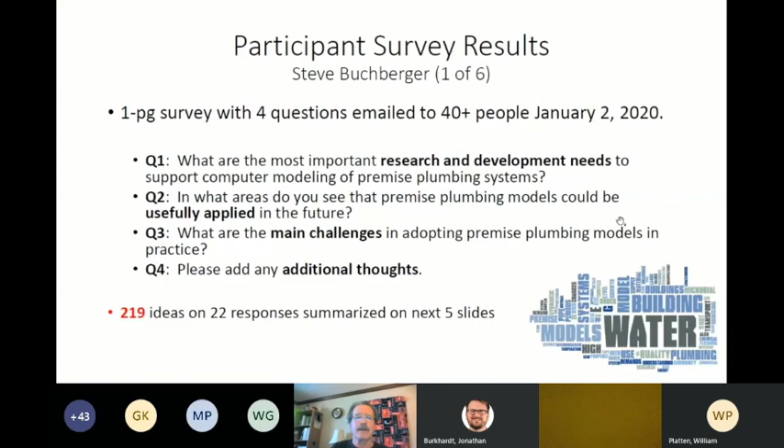One of the underlying themes, perhaps an undercurrent, was some recognition that we've got a collection of individuals across the planet with a lot of experience working with water distribution systems. We have a good history here, probably 20 or 25 years, where we've applied, developed, and validated some models. Yet we're moving into an area that's kind of uncharted, and it presents some new challenges to us. In fact, there are some pretty dramatic distinctions between a water distribution system that we're more accustomed to dealing with and a premise plumbing system.

Flow regime, we've talked about this already this morning. The presumption is that in the water distribution system we're dealing with plug flow, turbulent flow, whereas when we get into a building we're talking more about laminar type flows, stagnation, maybe the transition through critical flow to turbulent flow. So we have a much more diverse mixture of flow regimes, and that has important implications for how we model water quality, because it impacts the velocity profile in the pipes.

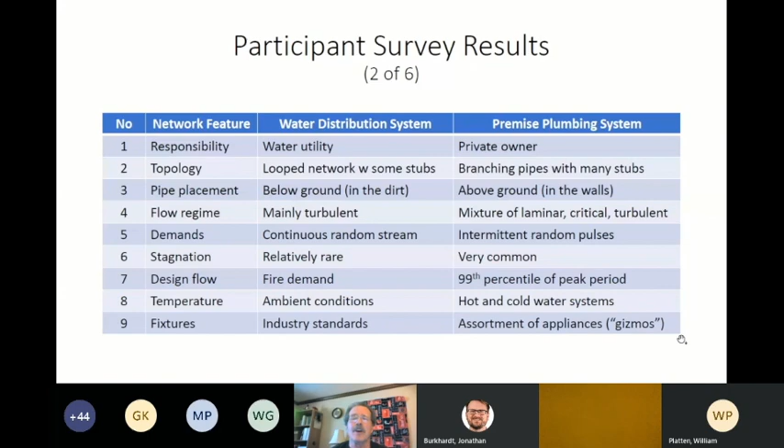And then even the fixtures themselves - in a water distribution system we have a lot of what we might consider industry standards for what might be used. But in contrast, in a premise plumbing system we've got, frankly, a wide universe and a broad assortment of appliances. And I had to chuckle too - one of the responses that came in called them a galaxy of gizmos that are out there, all part of how we draw water out of the premise plumbing system. Okay, next slide.

So the remaining slides, I'm just briefly going to touch on the four questions now, and that was the first one, of course - research and development needs. Three major themes bubbled to the surface here. One was we have to get just a better understanding of the water quality dynamics in premise plumbing systems. And this is a complicated problem - we all recognize that. We're talking about water chemistry issues, pipe material issues, microbiology, different flow regimes, intermittent stagnation, and so forth. So it's something we have to focus on if we want to get a good understanding of predicting water quality changes inside of a building.

And then that goes hand in hand with getting a better characterization of, and being able to model, water demands. Now, we've made great progress in this area, tremendous work by the Dutch group and Mirjam.

We have to find a way, in the third bullet item, to combine these two: improving our understanding of water quality dynamics, driving it with a water demand model to develop some kind of user-friendly network type model, perhaps an extension of EPANet to premise plumbing systems. Those were really the three main themes that came out of the needs identified from question number 1.

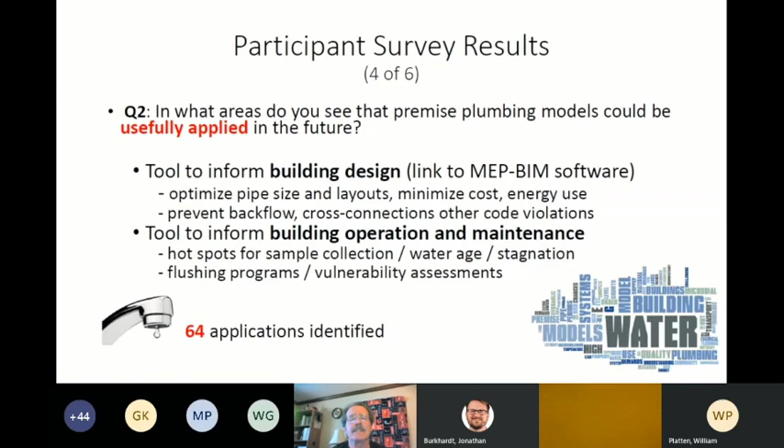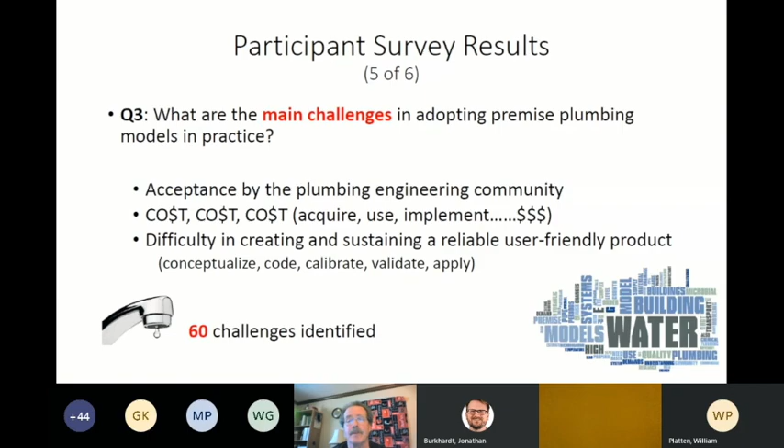The third challenge was the overall difficulty in creating and sustaining a reliable, user-friendly product. In a sense, we're after the holy grail here for premise plumbing. We'd have to conceptualize what this would look like, combining water quality and water demands, code it up, calibrate it, validate it, and apply it. Somewhere along the line we have to find funding to sustain an effort like this. It's a worthwhile challenge, and we have knowledgeable folks interested in working on it—it's analogous to the TOE in the physics community, the theory of everything, here in the case of this premise plumbing model.

So I don't know how I did time-wise. I think I might be a little bit ahead of schedule. Yeah, you're good on time, Steve.

All right, so I'll wind down sooner rather than later. I think I've covered the 6 slides and touched on them. I'll mention I'm in the process of consolidating all 22 pages so we'll get those bound up so you can see the full reporting from all the participants, and you can draw your own word clouds if you like and your own conclusions.

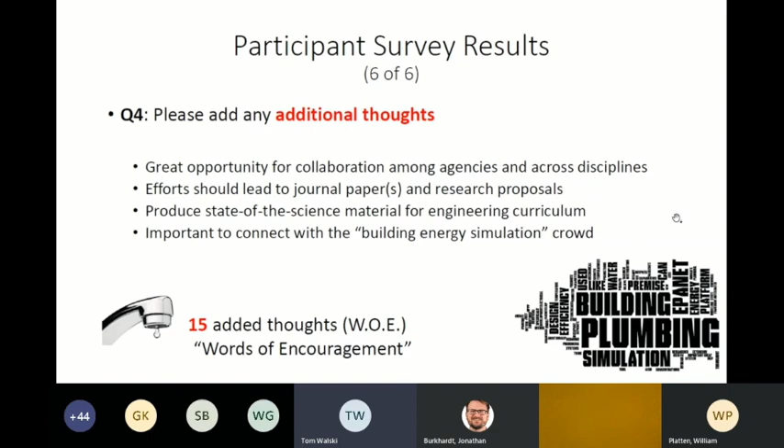We don't have a lot of storage in buildings in the United States, but we're working in China. They have rooftop tanks everywhere, pretty much, and they have terrible water quality. But they refer to this, instead of premise plumbing, as secondary water systems. And yes, that's kind of stuff we're going to be testing - can you really afford to have booster disinfection in these tanks, or do they stratify as part of the work we're doing? Also just how to operate them becomes a real issue, because they do have some major losses there. So it's not just the U.S. where this is happening. They actually have some regulations coming down the pipe about this, and they're trying to pass the responsibility for running these systems off to the water supplier and not to the building owner. So the regulatory environment there is more demanding of this kind of stuff than the U.S. I'm waiting for the U.S. to try to come up with some regulatory requirements, because that's what it's going to take to drive any money into this. Otherwise, it's just a bunch of us researchers talking to one another.

Thanks, Tom. And Morris raised a point - I don't know if this was specifically to any speaker, but I think it's a good point to ask as we're thinking about where to go next: can existing petrochemical plant piping models offer any tools that we could use in premise plumbing modeling? I don't know if any of the speakers want to speak to that, or we can just leave it as a discussion point for future meetings and a question we ask ourselves.